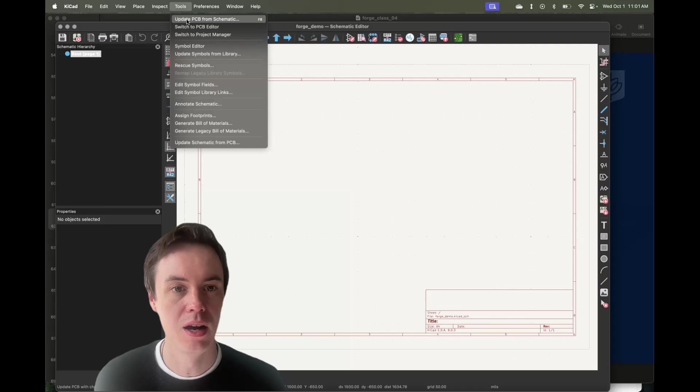And you can see it immediately opens a project file here, and it gives us a PCB file and a schematic file. So we already have our two linked design and then the sort of realized board files that are blank that have been created for us. So that's wonderful. We can go in if we want, we can start placing parts and then update our PCB from our schematic in order to get over to our PCB editor or just switch over to our PCB editor.

And now we're in the matching PCB file to the schematic file, right? So these are the same. That brings us to this nice PCB file, which we can also just directly go into. Now to set up our board, what our thing is capable of doing, right? So as we know, when we open this, sort of the main thing that we really need to pay attention to is which layer we are on and designing for, right?

So anything you do, you can put text, you can put it in copper and it will mill it out of copper if you put it on the front copper layer or the back copper layer. You can put it in the silk screen and it'll draw it on if you send it off to a board file, and that's the same text. So we really care about what layer we're on, and those layers match the layers on top of the board in our stack up, right?

And when we're designing as well, right, we have a front copper layer and a back copper layer like this board. So this is a two layer, actually this is a four layer board. But if we have a single sort of simple two-layer board that just has copper on top and bottom, that's what it's given us, right? Just front copper and back copper. There's no middle layers of copper here.

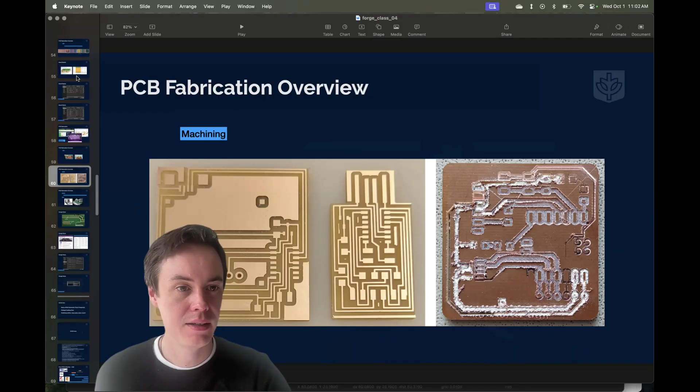But if we change our board stack, we can actually add middle layers of copper so that we can get this kind of a thing and design these inner layers as well. And then we'd be able to switch in between those layers of copper, just like we can switch between these two layers of front and back copper.

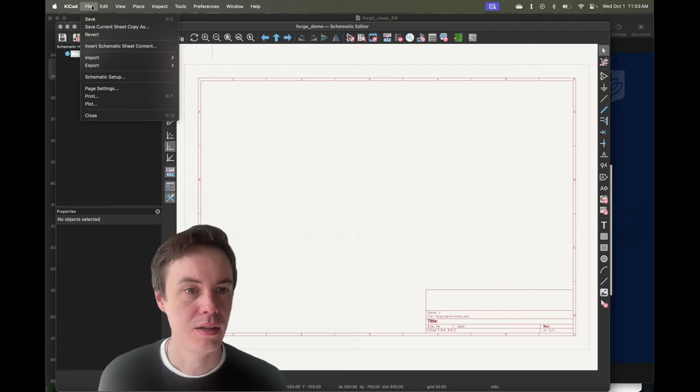So the place we need to go to set up our project is the board setup in File, which, I'm curious if this works from our schematic side. No, right? This is for the schematic setup. So we need to be in our PCB file, and then we go to File, Board Setup, and now we get our board stack up and our design rules, right? So one of the nice things here is we have import settings from another board and we can just pick an old project.

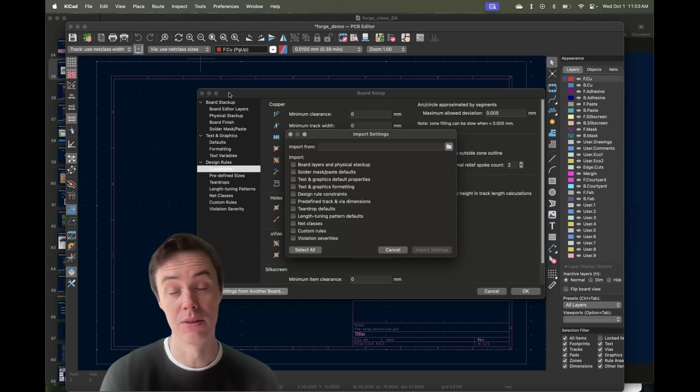So what you'll probably end up doing is doing this once ever and then editing an old file or importing the settings from another file. So you really only are going to have to do this once, but you need to make sure when you start your project up, you import your settings and you have them correct.

And so you can see if we look at our board stack up, right? We have our basic layers. Really, you're not going to do anything different for this for now, but you can go in here. This is probably a slightly easier menu to start with, and you can say like, I need a 4-layer board, and it's going to give you a pretty strong starting point for 4-layer, 6-layer, 8-layer board, right? For our physical stack up.

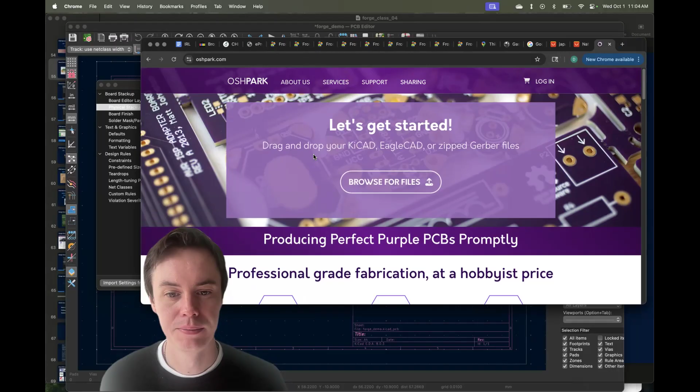And then we can go to a board house that we might want to use and look at what they offer us. So we're going to start off, we're going to use OSH Park because that's a pretty easy one to take a look at. And you can see they have a 6-layer service now. They'll tell you how much everything costs, a 4-layer fast service, et cetera, et cetera. And these are all the different services that they offer, a 4-layer service. So if you want to do a 4-layer board, go for it.

If you want this, this is a twice as thick copper, 2-ounce copper. So we typically talk about copper in ounces. The typical board is 1-ounce copper, which is like a dumb way of defining it, but it has to do with how much copper is actually put onto a certain size board. But so this will actually tell us if we click on one of these. So let's just pick one. Let's do a 2-layer board because that's probably what you're going to want to do.

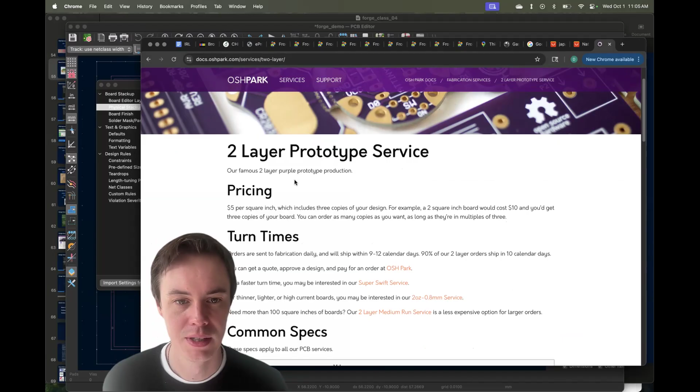4-layer Super Swift. Where's like the standard services? After Dark black prototype? Our classic 1.6 PCB 2-layer prototyping service. Okay, so this is our sort of standard. That's what the board will look like. It's gorgeous. They do a great job. They're relatively cheap. Made in the US, wonderful. You can see all these things about it.

And it tells us right here what the stack up is. So, this is a nice place to start because OSH Park will tell you explicitly. For some of these other board houses that are more complex, you can decide more. But this is a good place to start. So we can see that we have 1-ounce copper, which is 0.035 millimeters. And look at that. That matches exactly what we have here.

It'll tell us our solder resist, our solder mask, and how thick that is. So that goes here. That's this mask, 0.01 millimeters. It tells us our silk screen, and then there's a core that is 1.51 millimeters, right? And our tolerance. So we can just literally drop these in and you will notice that all of these match exactly this because this is the standard board stack up.

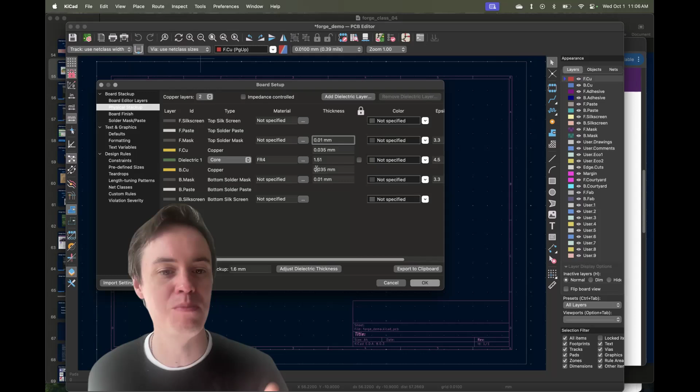So there's nothing you need to do if you're going to do a very simple 2-layer board here, but this is where you would go if you want to change your physical stack up. And this is a good thing to start with. Think backwards, make sure that you understand what you're doing. But in general, all you're going to really need to do is click 2 or click 4 and pick what you want. Okay, and then we'll move on to design rules, right?

So this is where you really do need to pay attention. And you can see there's a couple very important rules here. So for the Makera, you can see we've defined this sort of minimum clearance between two traces, the minimum width of a trace, the minimum size of any font, the minimum size of any hole that it's going to be able to do for us, right?

And everything is 0.2, 0.2, so our minimum clearance between two things needs to be 0.2. Our minimum track width needs to be 0.2, and that's if we're designing for the Makera, right? Our minimum annular width and diameter, so let's see.

Our minimum through hole is 0.4, and you can see this actually says 0.3, so that's not good for us. So this is where you should go in and just kind of tune things up. 0.1 feels a little tight, nothing is 0.1 for us. So the annular width, which is this amount of copper left around that hole, which you can see represented in the little icon, that feels a little tight. So maybe we do 0.2.

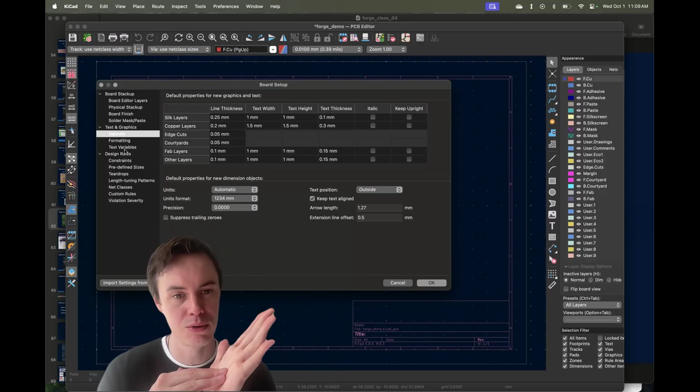And this is where we set all of these different things and make sure that we're going to be okay. So if we're designing for Makera, we're going to be very generous and try to make features a little bit bigger and no hardcore corners. We want everything to be 45-degree angles and gentle as much as possible because it's very easy to mill out stuff that you don't mean to mill out, particularly if you put things too close together. So keep that in mind.

The nice thing about OshPark is that they actually have, and I'm just going to Google it, OshPark KiCad design rules. And the first thing that pops up is literally a KiCad design rules setup that we can see, and it actually tells you go to File, Board Setup. Most values have conversions, but KiCad will automatically convert to your preferred units, and it will tell you exactly what you should type in for your two layers in order to be in spec

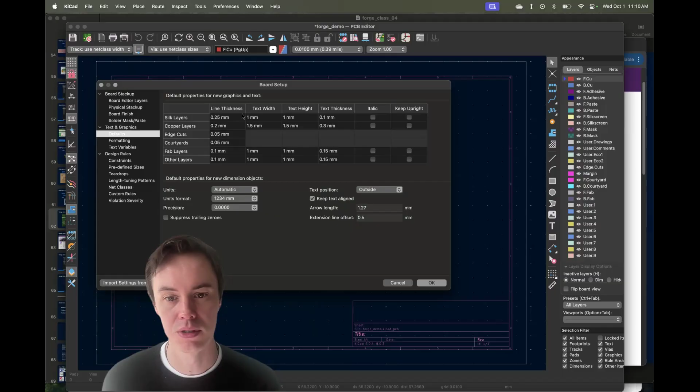for what OshPark offers. So again, this is a very nice, simple way to make sure that the board that you make can come out looking absolutely gorgeous and get uploaded to OshPark and be okay with their design rules. So once we're done setting that up, we hit OK. And the nice thing is when we start drawing traces on this page, they will automatically match our requirements.

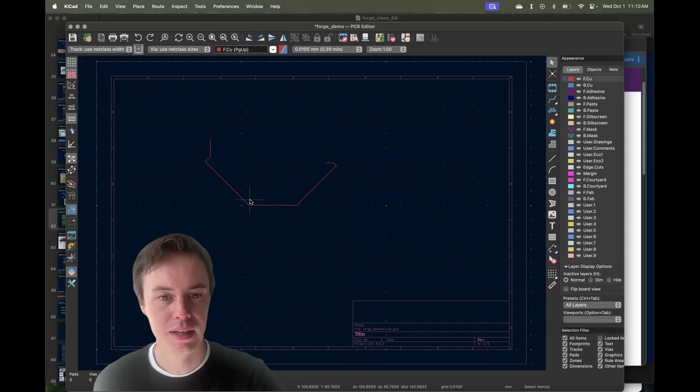If we finish a trace and we try to draw another one near it, it should bump it away once we've defined nets so that it knows that this isn't the same trace as this. So the problem that I'm running into here is it doesn't know that these shouldn't touch. But as soon as we connect them to pads and it knows that they aren't supposed to touch, it will make sure that we don't get close enough to that trace to be out of spec with our design rule.

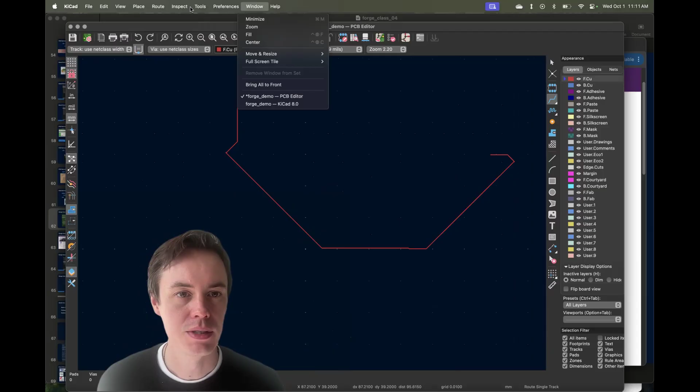And then we can run our design rule checker at the end, which is, I believe, Inspect, Design Rule Checker, and it will actually test everything against the parameters that we've set with our design rules. Okay, so that's a basic, quick intro to setting up a board. So just to refresh our memory, the main thing is we click here to start a new project, give it a new folder. It's going to give us these two, the PCB file and the schematic file. And then we're going to go into the PCB file.

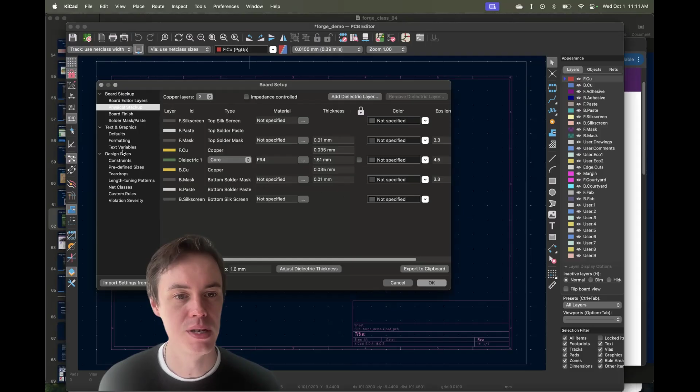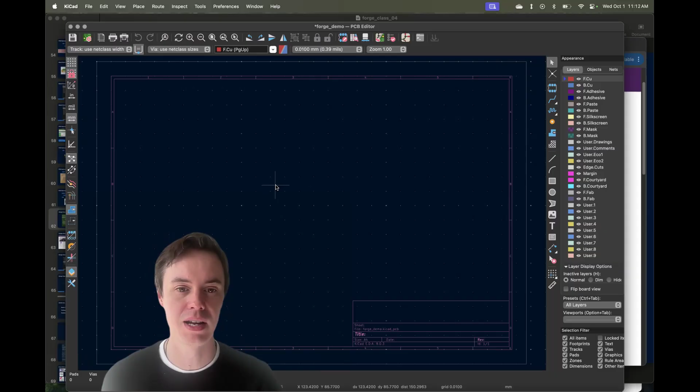We'll go to File, Board Setup, and we'll put in our physical stackup, and we'll put in our design rules, particularly focused on the copper design rule constraints and the holes for you guys. And that should match what Makera says and/or what OshPark says. And Makera is going to be more conservative because our tools are much less precise than what OshPark offers. So if it works on our Makera CAM, it will work for sure when you submit it to OshPark. All right.